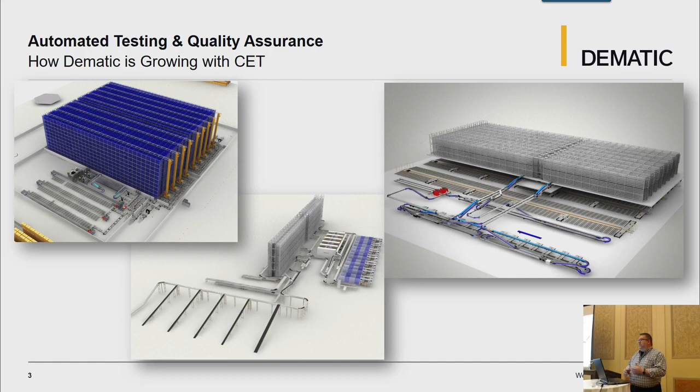One way to do that is through automated testing. It was natural to bring it into the whole DevOps scenario. Originally we were trying to do it just as a group as a whole, but it became more pronounced as we went along in our releases, our major releases.

The team that I'm responsible for right now, we do simply the building. So we do all the code merges from the dev branch into the RC branches, and we go ahead and do testing, we deploy. But on top of that, we're also building up our automated testing cases right now. We still have a long ways to go. We've laid our foundation, and there are still a few foundational items we need to get in, but it's a learning curve. As you start experiencing and getting deeper into the code, you start realizing, hey, I need to test this also, maybe it'd be good to test this out. As new things come up, as features change, we need to make sure the code changes along with it for that testing.

So why would one want to do automated testing?

Well, first off, it allows for a very fast, very consistent test. I want to do the same thing to the snapper every single time.

To give you an idea of just how much of an improvement you're looking at, from our extension, we have a particular model that we would test, and it would take about an hour and a half to actually run through all the testing. That's inserting, copying, moving, stretching, open, close, doing all the quick property changes, checking bill of material, checking the quote, all of that. It would take us about an hour and a half to make sure everything was clean and valid as we went through.

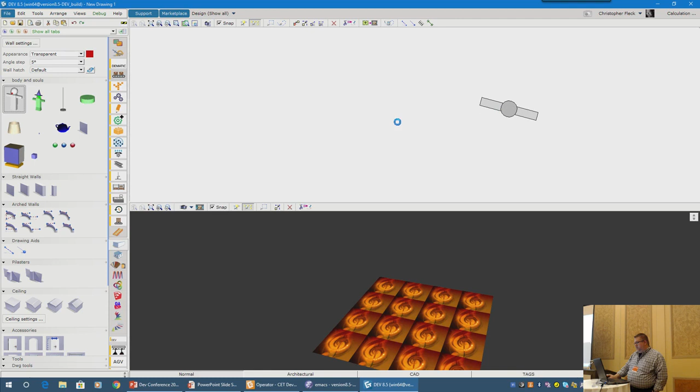One of the things in the debug menu is everyone should be familiar with the Snapper Performance Tracker, at least one way or another. It gives me an indicator of how this thing sits, and it might be a little difficult to see here, but what are my general performance issues with this? The amount of resources as far as 2D and 3D lines and triangles that it's actually taking to build this thing.

What's the performance look like for constructors and getting average parts and getting the 2D and 3D builds? How long is it taking to do some of that? The new stuff down at the bottom here, the responsiveness, this is something that just got added, and they're still doing some additional work on it. So definitely pay attention to stuff coming out on that.

It's going to be things like clicking - what do you do, how long does it take to click for moving, rotating, copying, things like that. Those are all important aspects that need to be accounted for when you're developing new snappers.

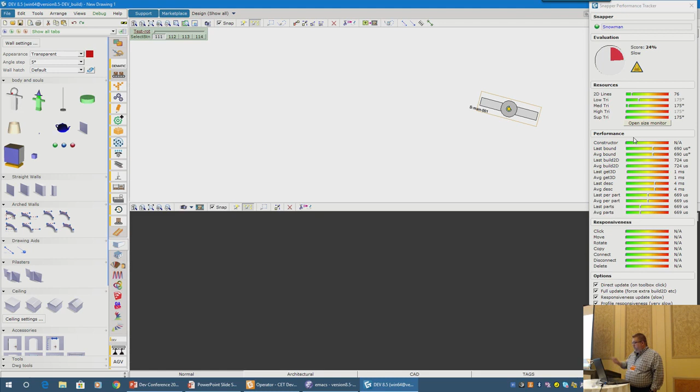So you can actually run this on any snapper. I can bring the teapot in, everybody's favorite. And as long as I have it on here, I can see. I'll reset the averages.

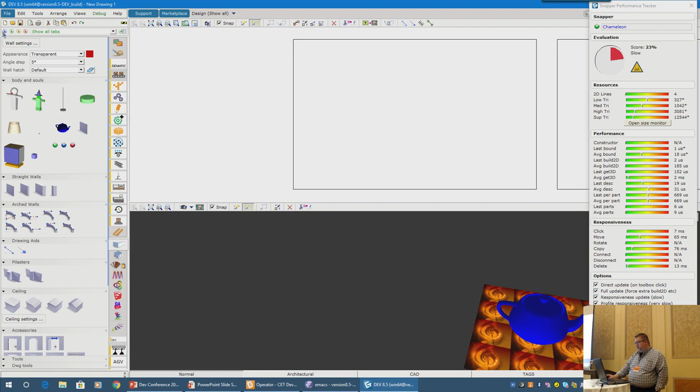Don't know what just happened there. I think I put in way too many. Make sure I didn't crash here. Nope, still doing something. Anyways, while we're waiting here, what you can do is utilize this, and it's going to be on each snapper that you click on, okay, so it's going to be on the active snapper that's sitting there. Apparently, I updated way too many times. So another component to this, maybe.

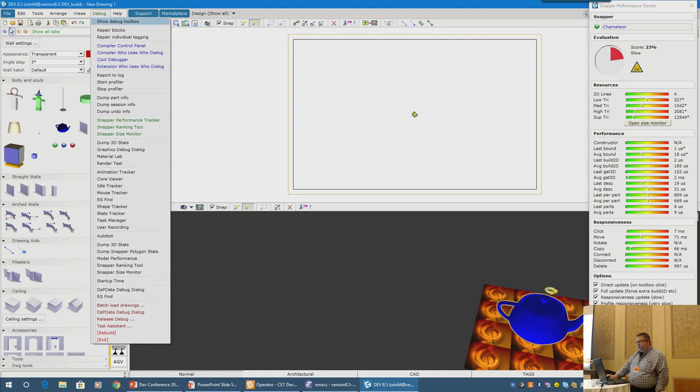Is what we call the dramatic pause. The other thing that you can do is actually do a snapper ranking tool, okay, and I'm going to show you a nice feature that we're actually utilizing when we're testing our extensions right now. I'm going to go into our controls. And these are simply electric devices that get added onto our conveyor.

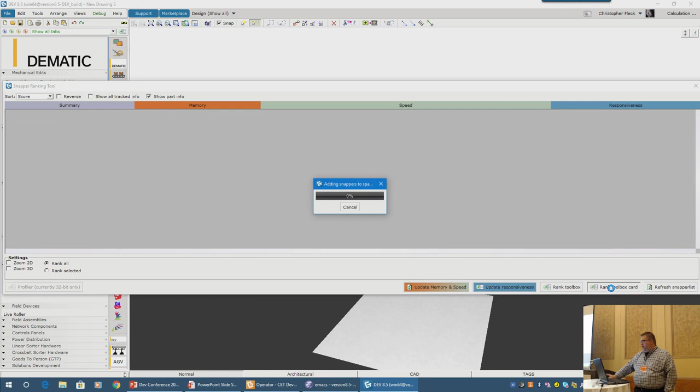Inside of the ranking tool, the snapper ranking tool, I have the ability down here to actually rank the toolbox card. And what this is going to do is it's going to take the toolbox that you currently have active and insert every possible snapper in there. Okay, so I'm going to go ahead and just run this. And it is going to insert one of everything into the drawing and then run an evaluation on it. So if I just drag this out of the way, you can see there's all the devices just got added in. Okay, it's a very nice utility.

And from that, I get this beautiful list of different things that I can look at performances on. I can do show all tracked info, and that's going to give me a wealth of information, okay, it's going to show me my 2D lines and triangle lines. I can just show memory aspect, I can show speed, responsiveness. I can do zoom 2D and 3D.

I can rank just the selected one, I can rank all of them, which right now I'm ranking all of them. I can go into my drawing, select maybe 3, and just run the performance track on those 3. Okay, this is stuff available to you today. So if you're not using it, definitely start using it. It'll give you a nice insight as to where problems might reside.

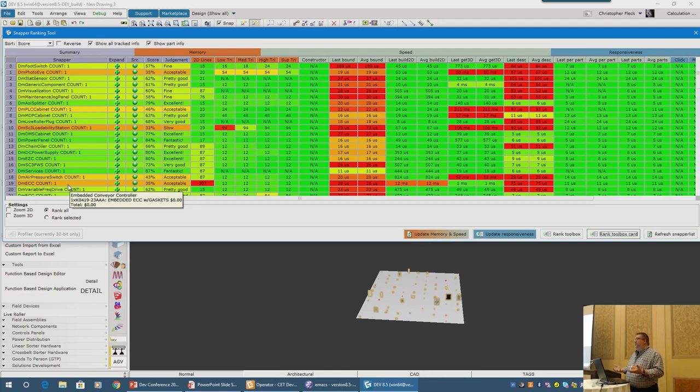Beyond that, what we have done at Dematic is create another extension or component to lay on top of that. We're utilizing all the information we're getting from those trackers, just making calls and grabbing information from those methods. But we need to do specific changes because we run our bill of materials differently than most people, our quotes differently, and there are different attributes in send calls, drawing saves, and things like that.

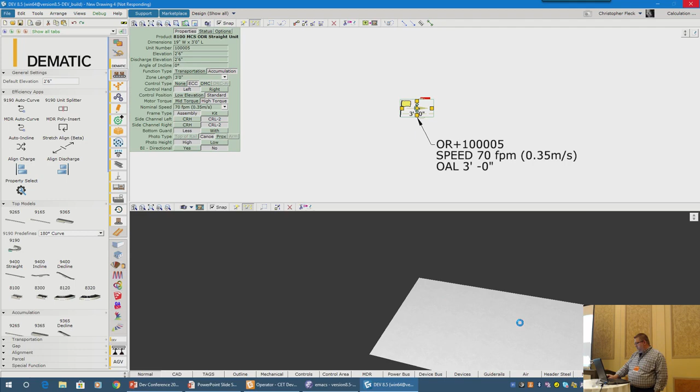So what we would do, I'm just going to bring a model in here, ever so gently. For those of you who have not seen conveyor before, there's conveyor. It's exciting, I know. Not sure why it's taking so long. Oh, I know why. This isn't the background correct. Yeah, it did, didn't it? We'll summon it. Maybe we won't do that one, let's choose a different one.

I think I've got to start over. Many apologies, we are working in a live dev environment, so please stay tuned.

What we have done is create what we identify as the Dematic test jig. I know Johan started creating the box, so thank you for that, it gave us a foundation. We were using it for a couple of quick tests, and since it already existed there, it was a perfect staging area to add all of these additional tests we wanted to do.

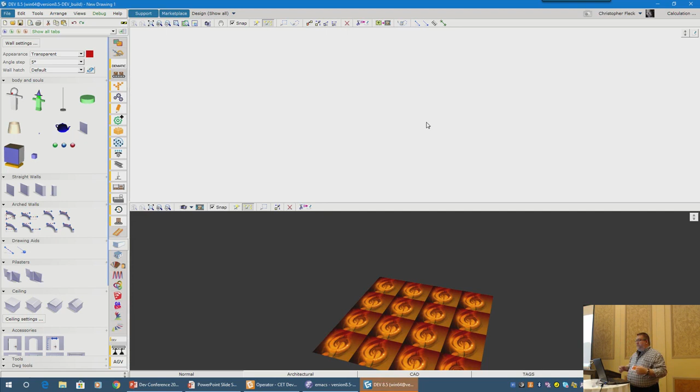We started breaking things out. Originally we were trying to do everything possible in one run, but we realized that's really not the best way to do it. Maybe we want to focus on certain areas, a single run in this scenario, and multi-iteration runs in another. Oh wait, we have CM3D files we should probably be checking, and full drawing checks. Let's run through those.

So what we've done is create this test jig. It allows me to come in here and check general speeds of any snapper in the drawing. If I try it again, we're going to bring in this model and see what happens. I will say performance is on our to-do list for sure.

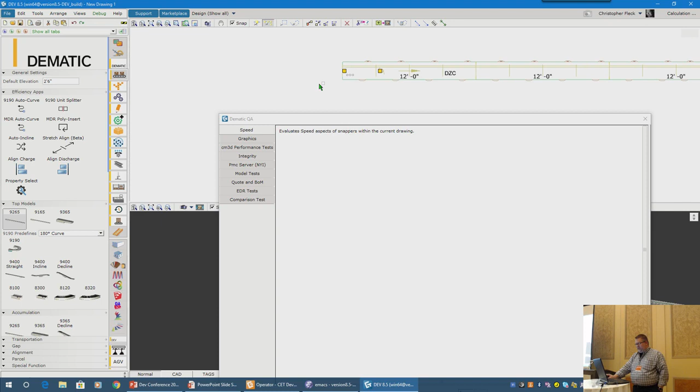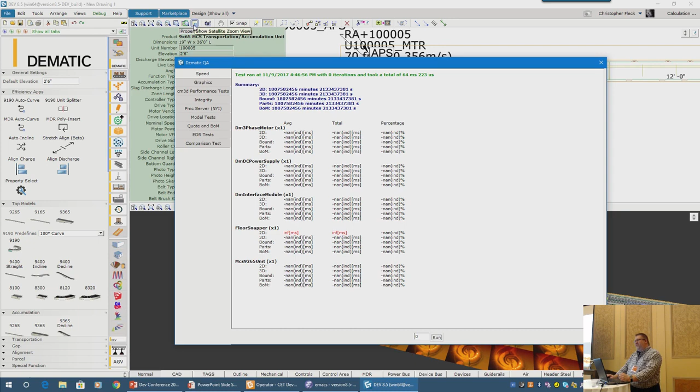I have just a piece of conveyor in here, and I can run 5 iterations of this to see what the speed is going to be like. It's going to look at every snapper on that and give us a bunch of odd information. We got to look at that one, not sure what happened there. Maybe I should fire up 8.0, I'm sorry.

So let's do. Oh, natural, I got to connect to Wi-Fi. You should be able to open up Emacs, just click on it. Just do the 5. Emacs doesn't want to open on that one. Huh, can you just fire it off from here? Yep, see what happens.

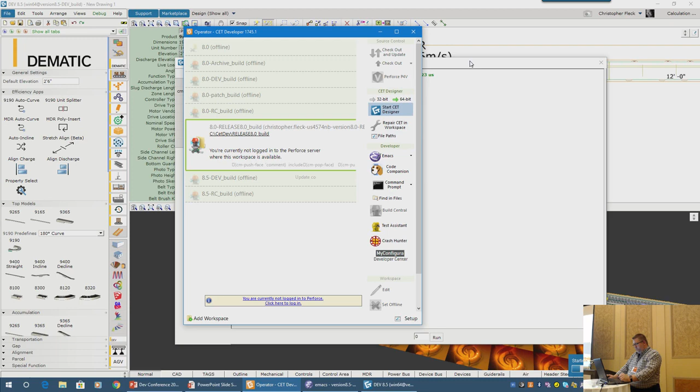Okay. But we have, and we're going to try one while this is going, because I tested this last night and it was working great.

We also have a CM3D performance test. We have a lot of CM3D files coming in, some from vendors, some from our R&D department, that we need to incorporate into Maestro. So we're searching for all the CM3D files we have in our extension, and I can go through and pick and choose, pick a cluster of them. If I do this, I can do a check all, and that's going to give me resources on that guy too.

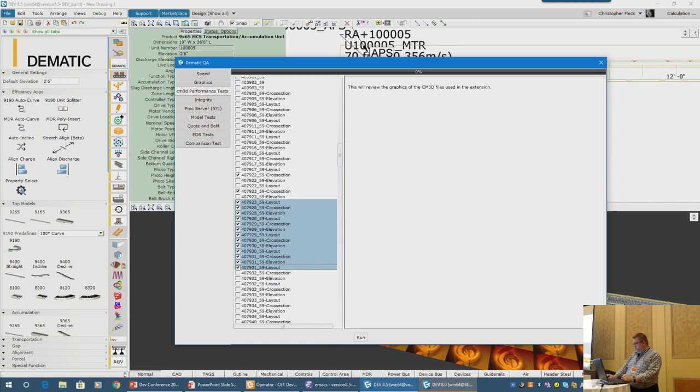So I'm going to run these, and it's going to give me a full list of the amount of time it took, the cost, the budget. How many budgeted lines do I have, how many low, medium, high triangles am I allotted for these items? This gives me a very nice look into whether things have been optimized yet or not, and you can see the amount of red on this side tells me it has not. So this would be a very good opportunity to increase performance. I get in and get into that 2D aspect.

And maybe I can pare those lines down to 250. I think, correct me if I'm wrong Gustav, you guys were talking about trying to make an algorithm to look at the area versus just a hard set 250. So that one's up and coming, that's going to be another thing. Right now it's just hard set 250 for 2D lines, but they're going to go ahead and expand it to whatever the area coverage is. So if you have a larger work area, it'll make that accommodation. If you have a very small profile, like a plant or something like that, it's going to really reduce the amount. So other things to look at.

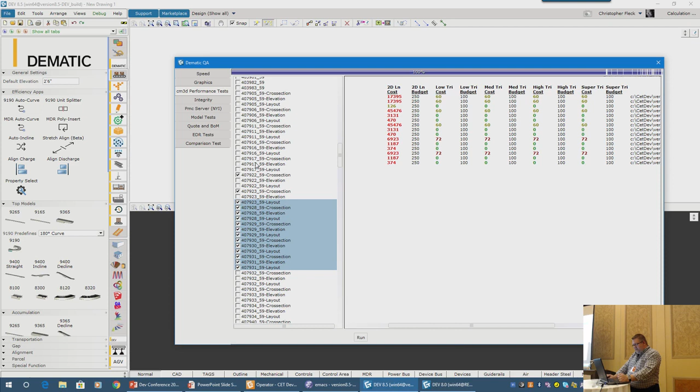All right. The other piece, the more critical one for us, is the bill of material tests.

So I can come in here and I can say I want to run any of these models, and I'll just run a little bit leery running the last one. We're going to try it one time again.

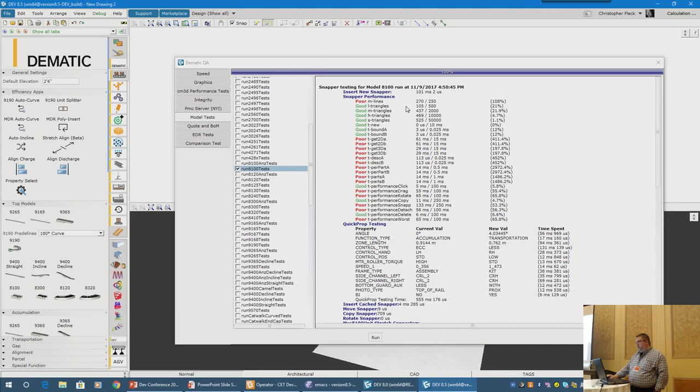So I'm going to go ahead and run a test on this, and this is going to insert, and it's going to do all of the testing that I wanted to do on this. It's going to insert a new snapper, insert a cached snapper, it's going to copy, move, rotate, stretch all possible stretch points, and give me a performance. You can see the dialog that popped up here. It gives me a performance on the number of 2D lines and 3D triangles that are being used to generate this thing. A simple quick property test.

Now I say simple because we're not going through every possible iteration of the quick properties. We're going through each quick property and changing it one time to make sure that it's at least sound. The other bill of material and quote testing is what we're going to be doing the multi-iteration on, changing every possible value.

But like I said, we insert a cached snapper, move it, copy it, rotate it. We stretch every possible connector that is stretchable. And this does go down to a bed level. We have a scenario where you may have a unit that consists of multiple beds, and we can now take that unit, test the unit as a whole, but then go into the unit, into bed space, and begin working each individual bed to make sure those beds work properly.

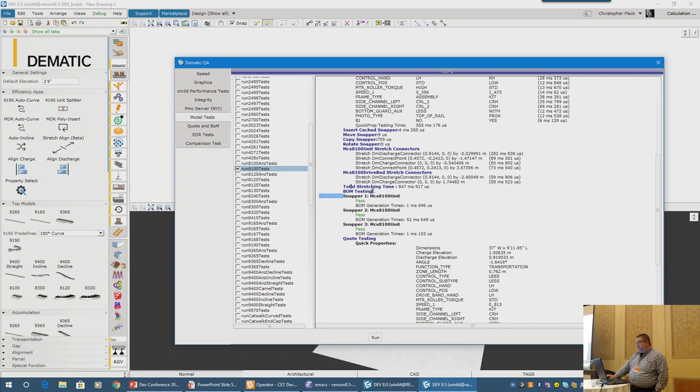We then give a total stretching time, and then we have a bill of material testing. In this case, I have 3 different snappers that I tested. They all tested out fine.

If something went wrong, then what I'll see is something like this, where it's going to give me the quick properties, and it's going to say, hey, this particular bill of material failed. This is how you set it up to match that bill of material, so you know how to reproduce that issue.

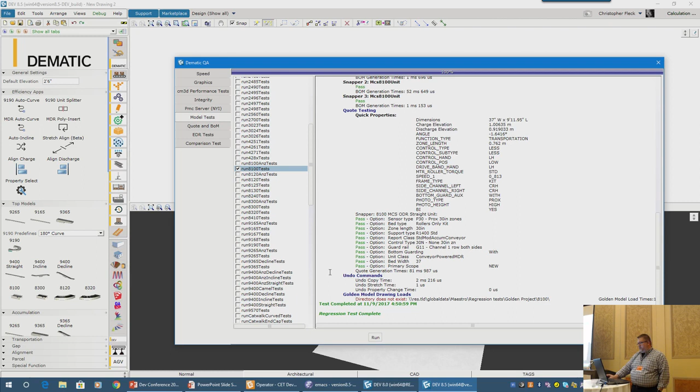We're testing undo. Undo's been a huge thing for us lately, as people keep forgetting to take care of undos. And so this is going to give us the ability to test all the undos properly.

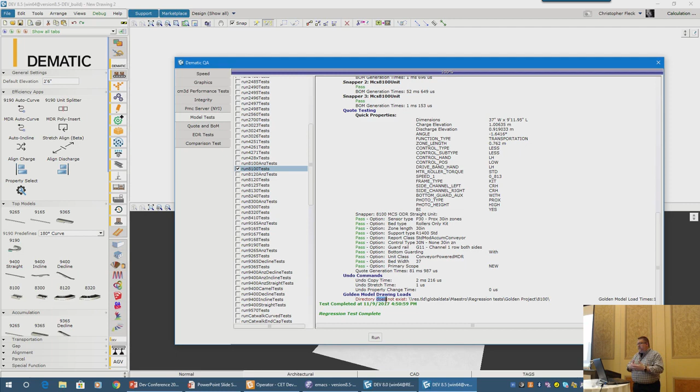And then we also have what we're calling the golden model drawings. For each one of these models, we have a drawing set up with a ton of different variations of it, different lengths, different widths, different quick properties. We're simply opening those drawings, testing to make sure that things are working. It's a simple load, save, load, but it's going to enable us to make sure that nothing has failed in that regard.

Now, bill of material testing, I'm not going to run through this one too quick because we're getting a little bit low on time, but the iteration down here allows me to change the number of iterations that I run the bill of material test for, or the quote test for. So I can set it up for 5, I can do 10, I can do 1,000 if I want to, and it'll just sit there and crank away until it's done, and it'll give you a final list. In fact, I'll run them on one of them here, so we'll do an iteration of, say, 10.

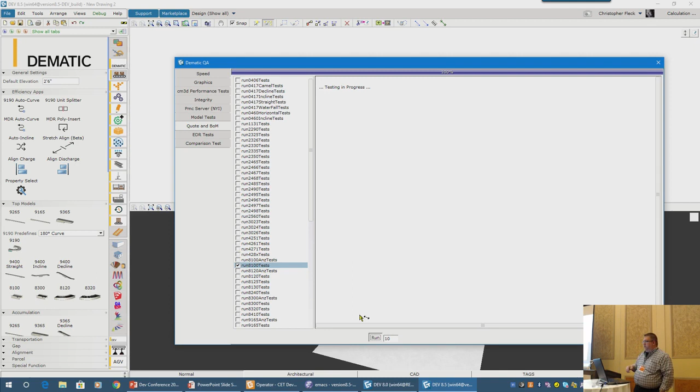So this is going to go ahead and do a change every single time, and we do need to adjust our progress bar at the top, because yeah, we're not done yet, but there we go.

So you can see here that if it didn't have a failure, it's going to show us, hey, it passed, great. If it passed, I don't care about what the configuration was, because it worked. But if it does fail, it's going to list out all of those quick properties and tell me, okay, this is how you need to reproduce it.

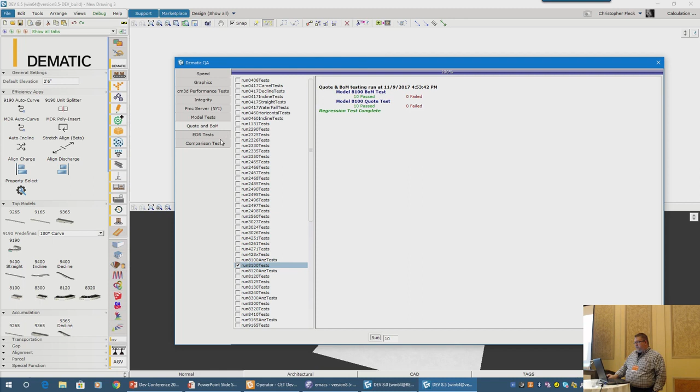The other final thing that we're doing is a comparison test, and this one's a little more in depth. What we're doing is we're taking... I'm just going to throw some things in here a second.

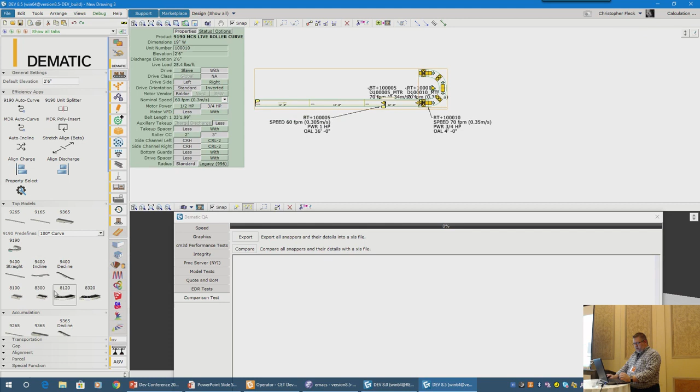So I'm going to take that, I'll plug one of those in, and let's run one of these. So we've got a nice little setup here, things going around.

Pretty simple. I can take this drawing and I'm going to create a baseline template for it, a baseline Excel file. And so I'm going to go ahead and run this export on this test. And I'm going to call this, I'm going to save it to my desktop, and we'll save it as export test. And overwrite it, yes please.

Okay, now what I can do is, down the road, I can use that Excel file as a comparison. So if for some reason I open up this drawing and something has moved, I need to know what moved. Okay, now I'm not sure how many people have had issues in the past with this.

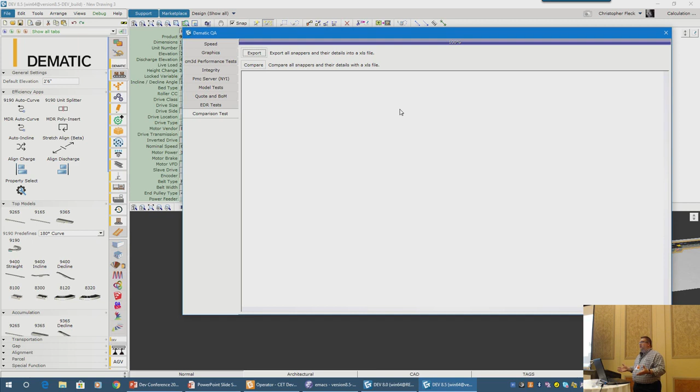I know we've had issues on our side because of how we're dealing with some of our snappers, but we've had drives move, we've had units completely disappear. And when you're talking, you have 1,000 units that you're dealing with in a drawing, going one by one to make sure every one of them's there is really tedious.

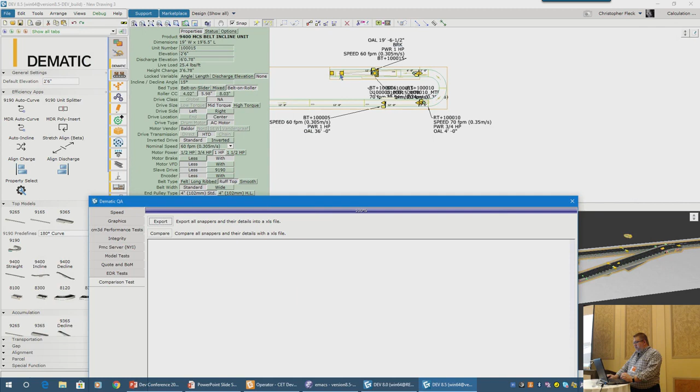So sometimes it's a component of the snapper, of the unit. So like my drive might have moved a little bit. So what we did is we now have the capability of saying, okay, I am going to take this guy and I'm just going to, let's see here, I'm going to go to single select.

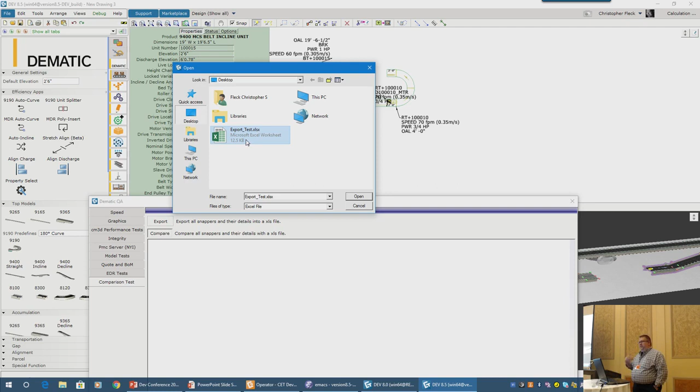I'm going to just drag him over here, and I think I moved everything already, so everything's probably going to pop up. But I'll rerun this comparison. I'll select the same table that I just exported, run and open, and it's now going to tell me everything that's changed.

So this unit, the position changed from this to this. Same thing here. Part number is now missing. Position change, position change, position change.

So I did move everything at one time, but this is going to enable us to take an entire drawing and review it. Assuming we still have that base export, and we need to make sure that we create those base exports against our regression test drawings that we have.

Right now we're sitting probably 16 full drawings that we have. We're trying to get more from the end users. So if you have good ones in particular, let us know, and then we'll load those up. But we want a nice base to start from, to say if we have problems, let's find them.

Let's use these projects that have been done in the past, compare against them, and make sure everything is still sound, because we get into drawings over and over and over again throughout the years.

We'll go into facilities and do retrofit work. So we're adding ship lanes, we're adding a sorter, we're completely changing how a merge is done. So there's all these things that are taking place in these facilities that require us to go in and out of these drawings year after year. So as these things come out, we want to make sure we're not breaking them.

So this is just kind of a sampling of what we've been doing at Dematic. I highly encourage everybody, if you are not doing something like this, consider it. Bare minimum, utilize the tools that Configura has. I mean, they got some great tools out there with the performance trackers, with the ranking tools. There's a lot of new things coming out, and a lot of cool things coming out that's going to help you guys make sure your extensions are as solid as possible.